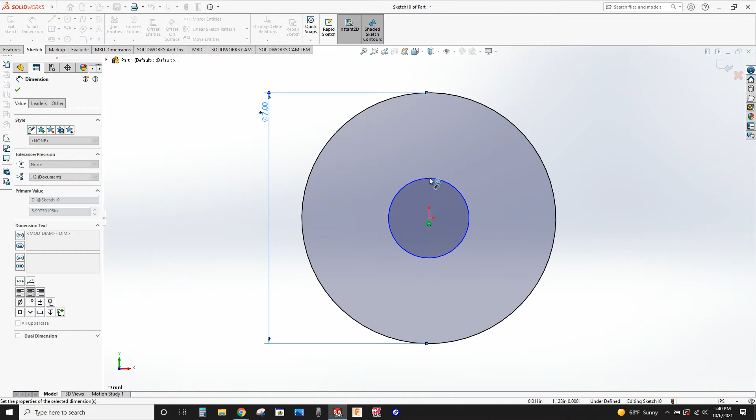It starts off with an extruded boss that we're going to sketch on the front plane using two circles, one for the outside, one for the inside diameter. The outside dimension is 7 inches, and the inside is 2. Accept that sketch, extrude it to 0.250.

Now we're going to have it like a little ring sticking off of this. So I'm going to do another sketch on this face. Start my circle from the center and make 2 circles in here, and dimension those. The inside is 2 inches again, and the outside one is 2.75. Everything's black, that's good. Accept that, extrude it 250, so it's an overall thickness of 0.5.

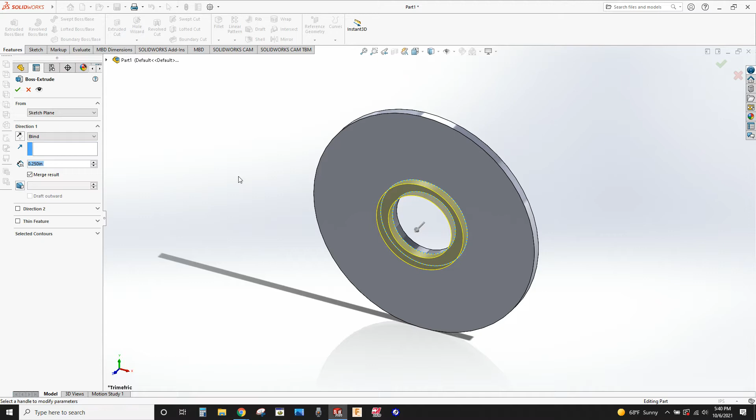All right, now comes the fun part. We're going to do a new sketch. I'm going to straighten this out first so I can look at it from the front. We're going to sketch for one of the holes. We're doing 3 holes that are on what's called the bolt circle. The diameter of the bolt circle is 5 inches. The diameter of the holes are all 1 inch. So I'm going to sketch on this surface.

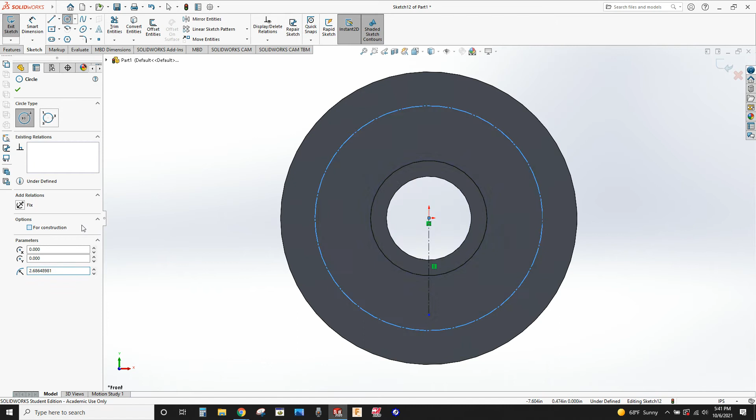The first thing I need to do is make a construction line, from the middle, right at that origin, straight down. Nice vertical line, straight down. Click and escape. Now I'll make a circle for construction just so you can see it, from here to here for construction. That, as I said, is supposed to be a 5-inch circle that all of these holes are going to be along that circle, okay?

So if the diameter is 5, from here to here has to be the radius, right? That radius is just going to be half of the circle. So I'm going to smart dimension this line and do 5 inches, slash for divided by 2. There we go.

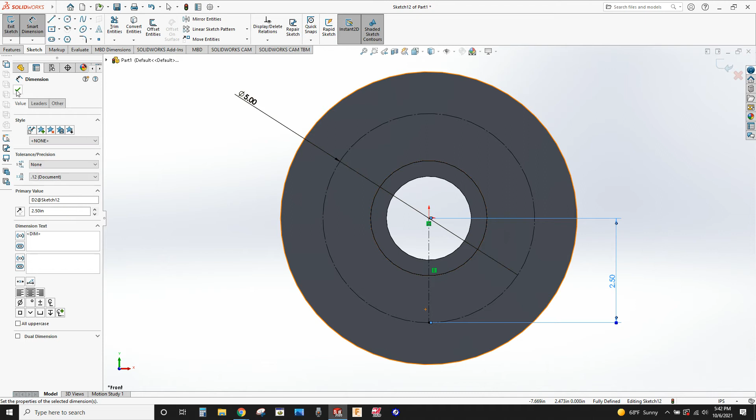Right? So now what I need is a circle down here. I'm doing all this just to get my circle sketched in the right spot. Here's my circle, and we know the diameter of that is 1 inch. Again, everything's black, everything's good.

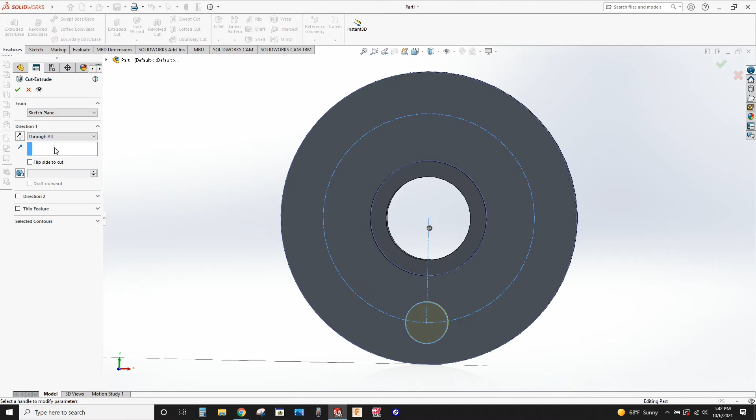Now I'm going to get out of this, and then go extruded cut. I always want to change this. If I know I'm going through, I always want to change it to through all. And we're good. So now we still need 2 more holes in this pattern. These are holes spaced equally around that bolt circle.

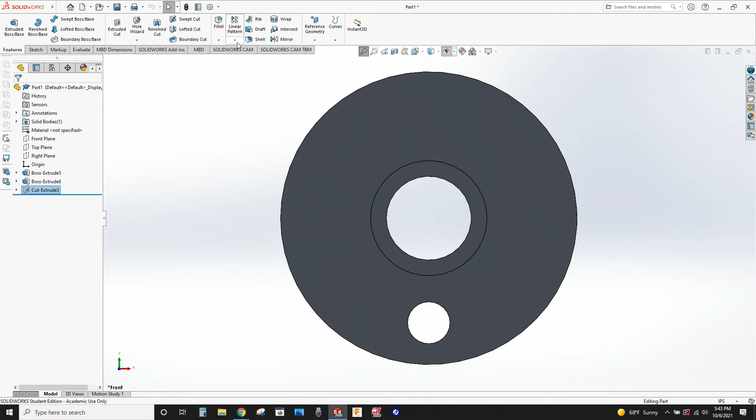So I'm going to go back to my front view so it's nice and flat. And I'm going to do what's called, under where it says linear pattern, click that little arrow and open up that menu, and I've got other options. One of them is a circular pattern, which is what I want to do. The direction means this right here means going around the circle.

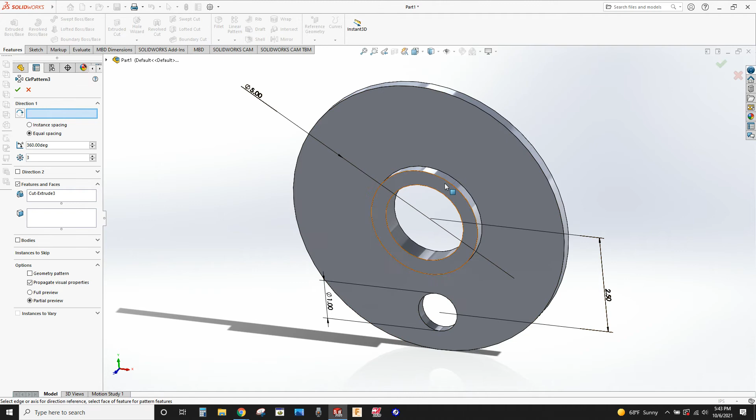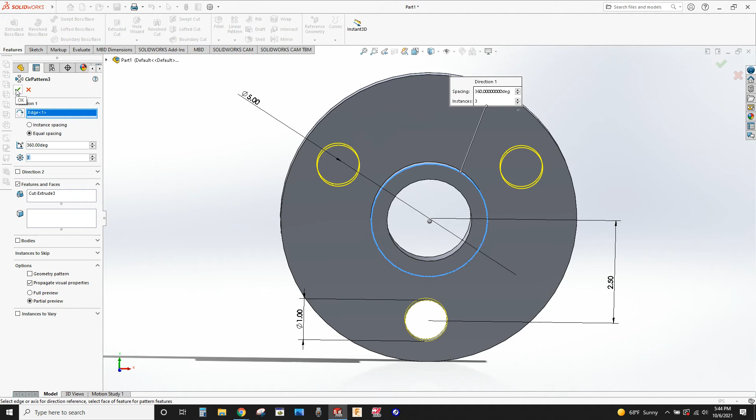Which circle do I want to use to project all those around? I'm just going to take this circle right here. It automatically throws up these 2 other ones because equal spacing is clicked right here for 360 degrees, and I know I have 3 of them. There's different ways you can use this. There's something called instance spacing, which is a little more complicated. But if you know you're going to be doing equal spacing, you just click on it, and then tell it how many of these circles you want to cut through. In our case, it's 3. When I click on this, it's just going to repeat that extruded cut nice and equally around that circle.

Of course, like everything else in SolidWorks, I can edit this feature and do more holes if I needed to. Maybe I needed 6 holes instead of 3, and that just updates automatically.

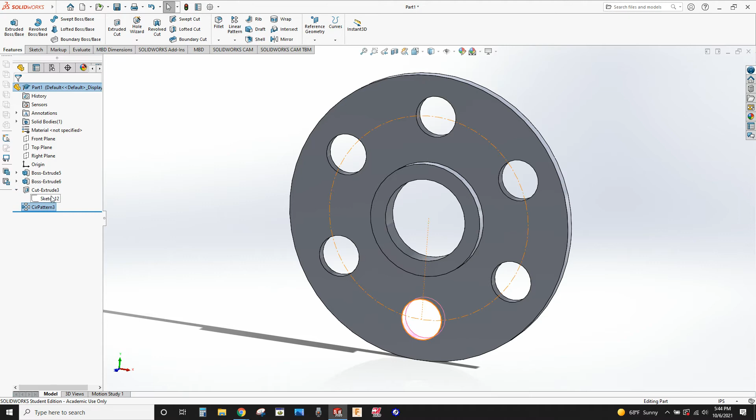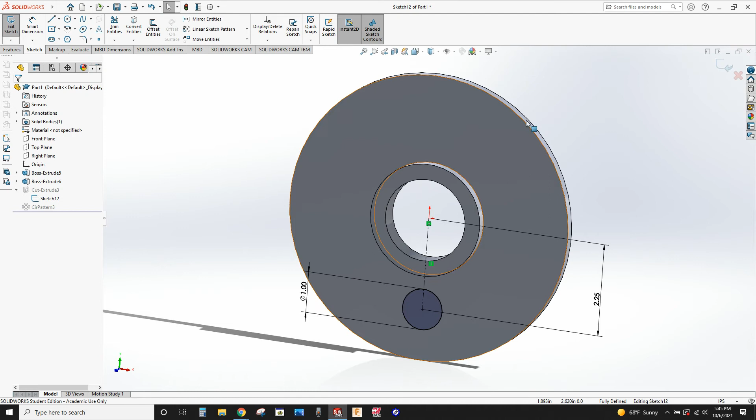Or I can go back into my sketch for my original hole, and maybe I'm going to get rid of this right here. Maybe I want this a little bit closer to the hub. Maybe it's 2.25 instead of 2.5. So I'm going to change that dimension. What this will do is update everything below it. So the hole, the circular pattern will all get updated.

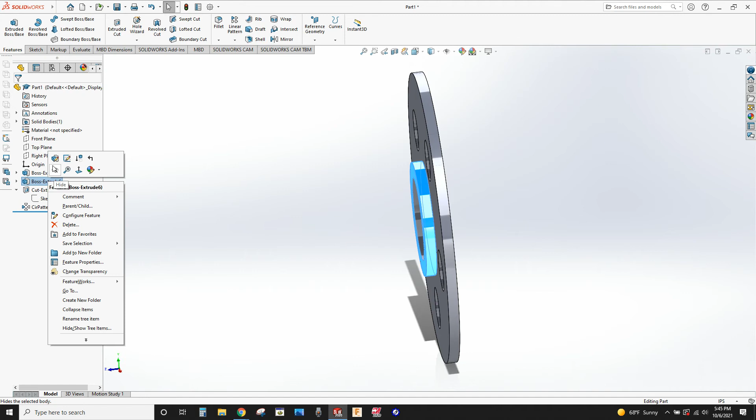And of course, I can go change this again if I wanted to, say, no, it really should be 5 holes. You can just keep, anything can be changed in here. The thickness of this extrude, maybe we figured out, oh geez, 250 isn't quite enough. Maybe it needs to be 0.375. We need a little bit of extra bearing on that. Okay, that's fine, that'll work too.

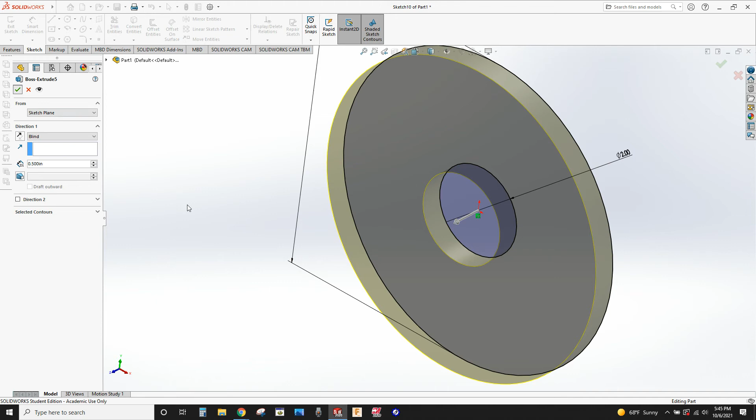And then we discovered down the road that this thing is too thin, so it broke. So we can change that, instead of 250, maybe it needs to be half inch thick. Everything updates. And here's a good reason, I'm going to go back on that. Here's a good reason why.

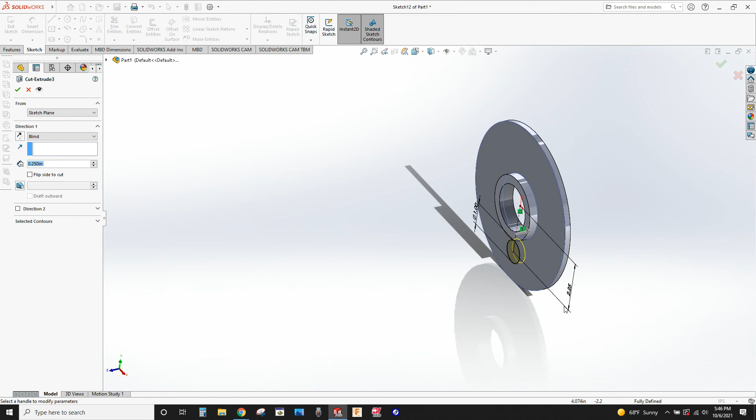Remember I said to you, for your extrude, I put through all instead of blind. Blind assumes it's going to go 250 because it sees that's how far it goes. So I say, okay, blind 250, that's good, right? That looks okay. If I go back and change this thickness to 0.5, it's not going to go through all anymore. It's only going to go 250 deep. That's why I like to use through all with that stuff.

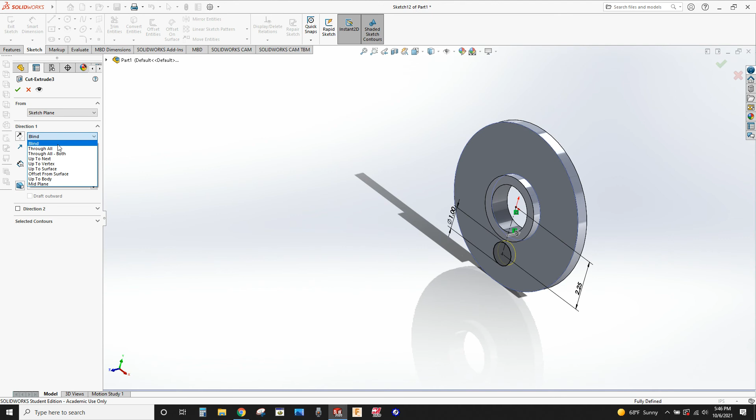So that's one way of doing the holes. Okay, now I'm going to get rid of that, cut, circular pattern, everything. All right.

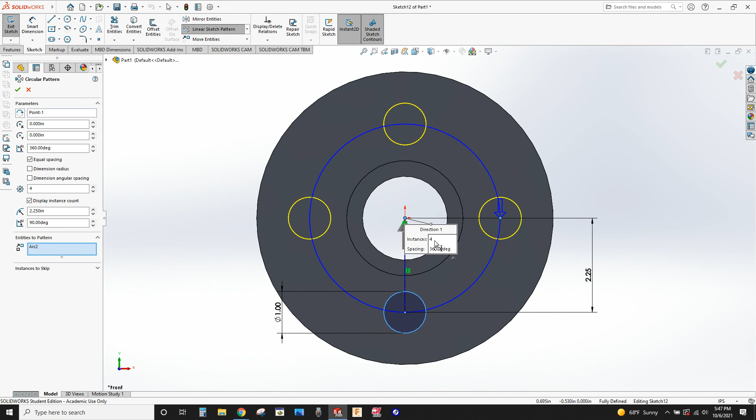This is the other way that Rafi was talking about. Right within the sketch, I can do the same thing. Within a sketch, I can do a circular sketch pattern. So I have to put in the parameters and the entities. The entity is the thing I want to pattern, that's this thing. It automatically knew what I wanted to do, except it has me doing 4 of them and I only want 3.

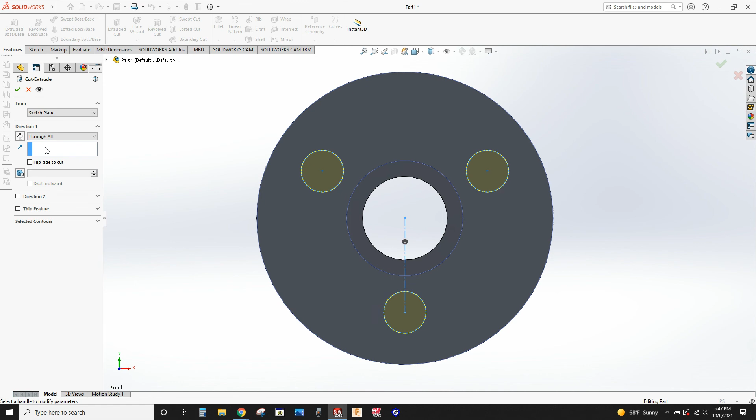And then what you can do is do a feature of extrude cut all the way through, and it will still do the same thing in the end. It's just that instead of doing it outside of the extrude, you did it inside the sketch. And that is how you can use a bolt circle with the circular pattern.